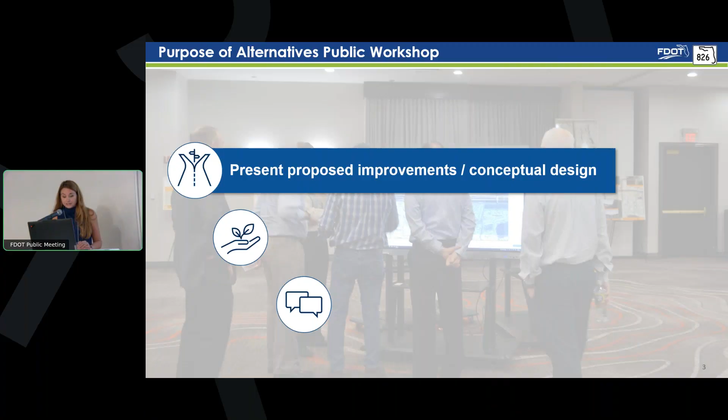The purpose of this workshop is to share information with the general public about the proposed improvements, its conceptual design, and the potential beneficial and adverse social, economic, and environmental effects upon the community. The public workshop also serves as an official forum, providing an opportunity for members of the public to express their opinions regarding the project.

Today's Alternatives Public Workshop has been broken down into 3 sessions. The first session is the formal presentation, which will explain the project purpose and need, study alternatives, and potential impacts, both beneficial and adverse. The second session is the exhibits overview video, which will explain the project exhibits and how to navigate the website. The third session will be the formal comment period, where you will have the opportunity to provide oral statements or in writing.

If you wish to make a comment, you can do so by completing one of the comment forms available at tonight's workshop. You may also provide oral statements by completing a speaker card. Those making oral statements will be called to the microphone in the order speaker cards are received. Please include your full name and address with your comment.

Oral statements will be limited to 3 minutes. You may also email or mail your comment to the project manager. All comments will be added to the meeting record. All forms of comment received will carry equal weight.

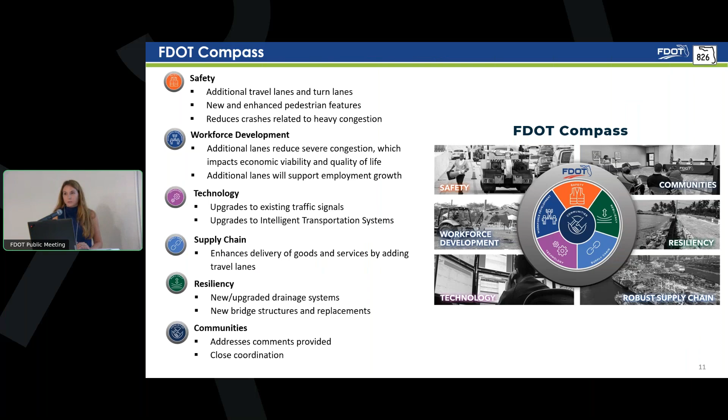Before we begin the formal presentation, we want to showcase the FDOT compass, which highlights key focus areas for the state considered in every project. These focus areas are safety, workforce development, technology, robust supply chain, resiliency, and communities at the center of the compass, as everything we do impacts the communities we serve. This project focuses on all areas of the compass. We are now ready to begin the formal presentation.

The Florida Department of Transportation welcomes you to the Alternatives Public Workshop for the State Road 826 Palmetto Expressway PD&E Study from US 1 to Northwest 25th Street in Miami-Dade County, Florida. This Alternatives Public Workshop is for Financial Project Identification Number 432-639-1-22-02 and Efficient Transportation Decision-Making Number 14308.

The Project Development and Environment Study, or PD&E, is the second step in the project development process that the Florida Department of Transportation follows to ensure consideration of environmental impacts, social impacts, public input, engineering design, and project costs when evaluating a planned transportation improvement project.

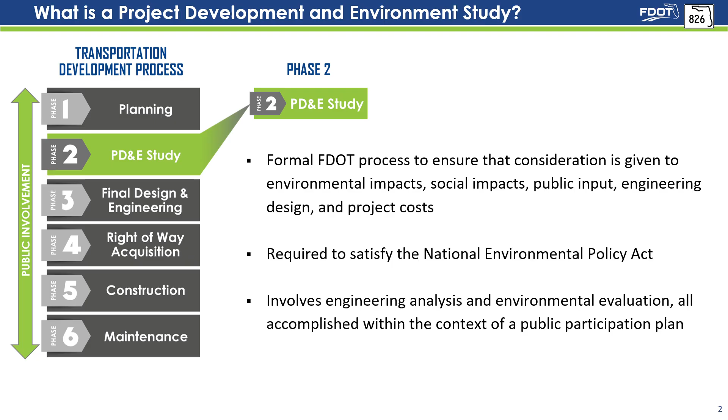The PD&E process was established by the FDOT as the state's procedure for complying with the National Environmental Policy Act, or NEPA, of 1969, and is required to secure federal approval and funding. The PD&E process is an integrated work effort involving engineering analysis and environmental evaluation, all accomplished within the context of a public participation plan.

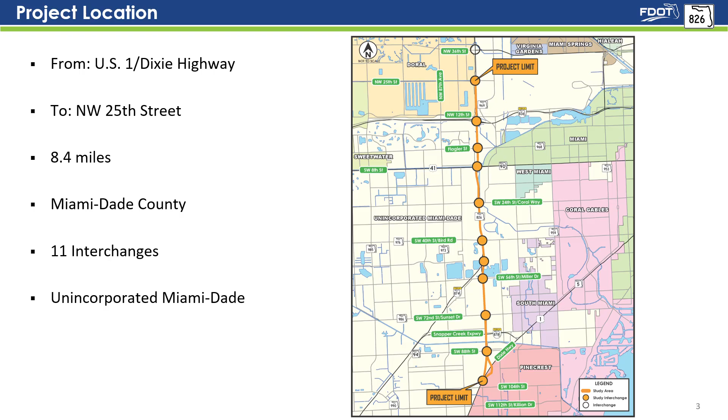The State Road 826 corridor project limits run from US 1 Dixie Highway to Northwest 25th Street, a total length of approximately 8.4 miles in Miami-Dade County, Florida. The study area includes 11 interchanges within unincorporated Miami-Dade.

The purpose and need for a project provide the basis for developing, considering, evaluating, and eliminating project alternatives. The Palmetto Expressway widening project's purpose and need are to accommodate travel demands, enhance safety, improve system linkage and freight, and enhance emergency response and evacuation.

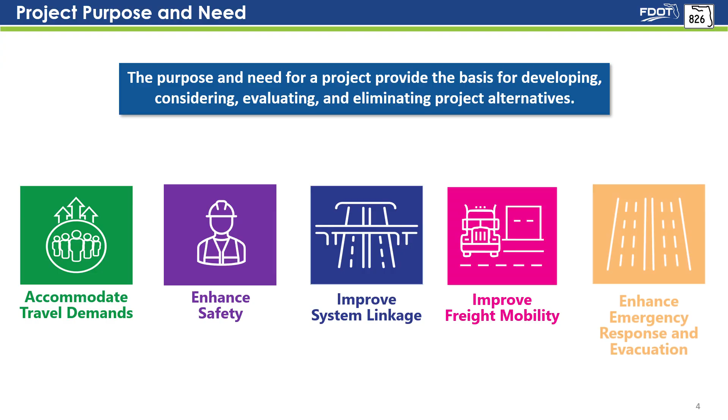In terms of corridor traffic demand, the project traverses 4 major transportation planning areas, with population and employment growth estimated to increase between 12.5 and 64.5%.

Concerning safety, the study area has experienced a greater overall number of crashes, with 4,729 crashes during a 5-year period. 56% of these crashes have been rear-end crashes.

This segment of State Road 826 is the missing link that will provide continuous improvements along the corridor and enable better connectivity with other roadways between US 1 and I-95.

The State Road 826 corridor carries over 10,000 freight trucks daily. Enhancing traffic conditions along this corridor will facilitate the movement and delivery of freight.

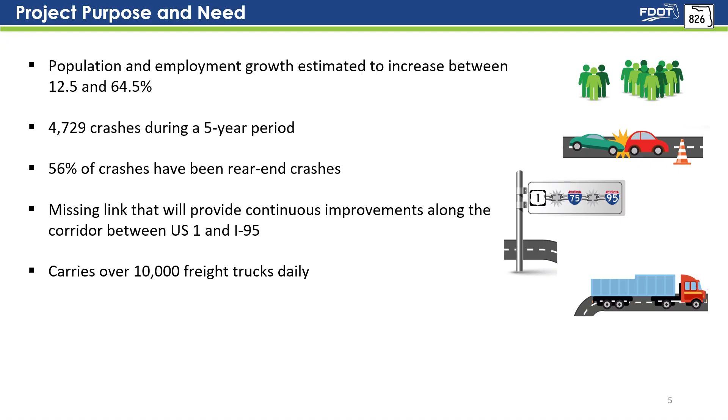State Road 826 serves as part of the Emergency Evacuation Route Network. State Road 826 is crucial in facilitating traffic movement during emergency evacuation periods as it connects to other major arterials and highways within the state's evacuation route network.

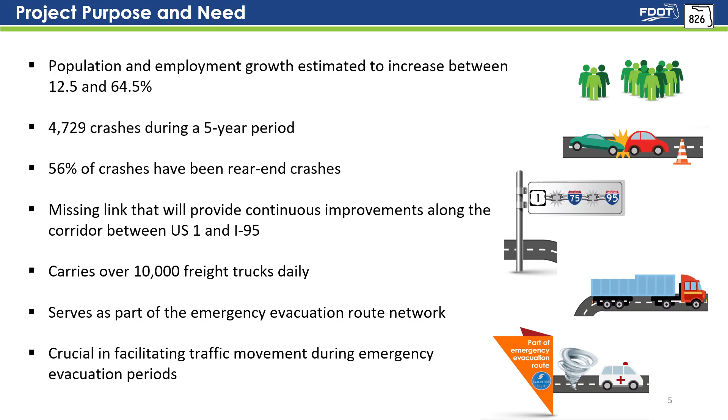State Road 826 between US 1 and State Road 874 consists of 5 to 6 travel lanes, 3 lanes in the northbound direction and 2 to 3 lanes in the southbound direction, with auxiliary lanes at select locations. Between State Road 874 and State Road 836, the corridor consists primarily of 12 travel lanes, 6 lanes in each direction.

The State Road 826 corridor is designated as a strategic intermodal system facility, is part of the Emergency Evacuation Route Network, and the National Highway System.

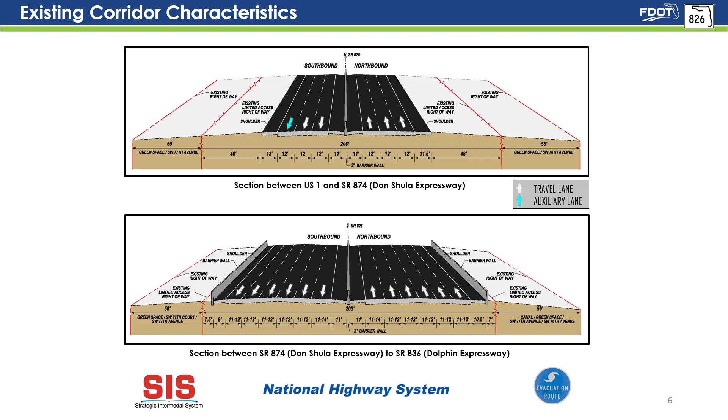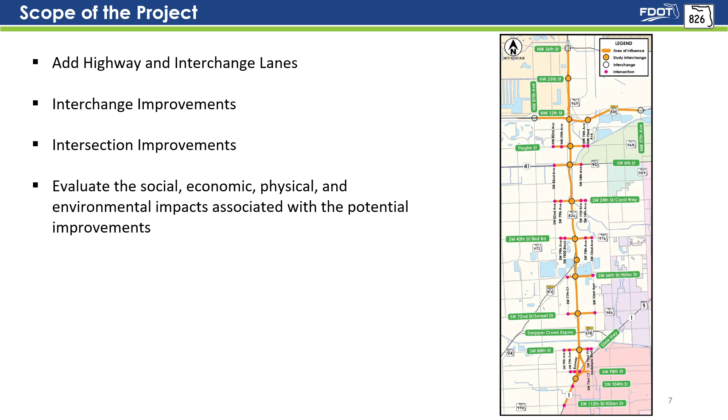The scope of this PD&E study is to evaluate corridor improvements that will add highway and interchange lanes, modify interchange ramps, and enhance intersection improvements to improve the corridor's operations. The study is also evaluating the social, economic, physical, and environmental impacts associated with the potential improvements, all with the goal of identifying a preferred alternative.

The PD&E study evaluated traffic operations with future projections for 2035 and 2055.

Public meetings are to be held to involve the public, local officials, and interested agencies in the project development process. These public meetings provide updates on the project's status and solicit input from the public. 4 public meetings have been held for this PD&E study. Today, we are holding the 3rd Alternatives Public Workshop.

Small group meetings and one-on-one stakeholder meetings have been held with public officials and other stakeholders throughout the study. The intent of these meetings is to present the latest project information and to provide opportunities to discuss specific issues and/or concerns. Project newsletters and fact sheets have been prepared for the study and distributed at all the public meetings. A project website was developed for the project and includes all pertinent information about the PD&E study. The project website is another method used to allow the public to communicate with the project team and provide comments.

The objective of this PD&E study is to evaluate alternatives that will address existing and projected operating deficiencies along this section of State Road 826. To keep up with the growing traffic demand within the study area, multiple alternatives have been considered, including a no-build alternative that maintains the existing roadway configuration and any other planned improvements along the corridor.

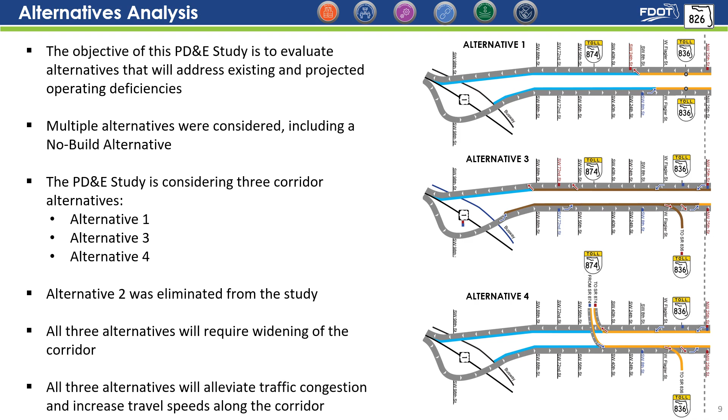The PD&E study is considering 3 corridor alternatives: alternatives 1, 3, and 4. Alternative 2 was eliminated from the study. All 3 alternatives will require widening of the corridor, and all 3 will alleviate traffic congestion and increase travel speeds along the corridor.

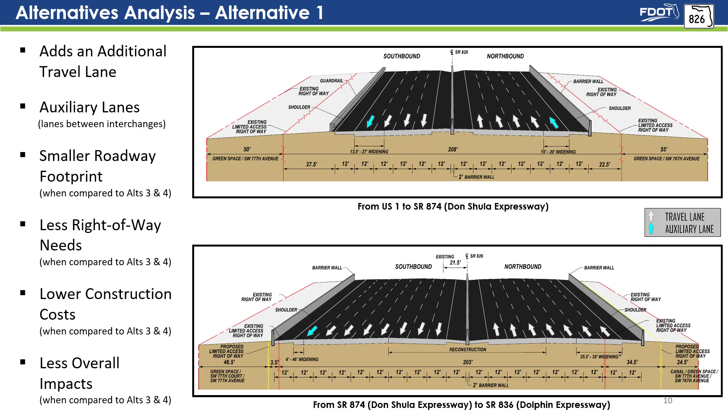Alternative 1 proposes adding an additional travel lane in each direction between US 1 and State Road 836, with auxiliary lanes at select locations. Alternative 1 requires a smaller roadway footprint when compared to alternatives 3 and 4. Therefore, Alternative 1 has less right-of-way needs, lower construction costs, and less overall impacts when compared to Alternatives 3 and 4.

Alternative 3 proposes adding an untolled managed lane in each direction between US 1 and State Road 836, with auxiliary lanes at select locations. The managed lane is separated by a buffer with tubular markers, with restricted access points for entry and exit.

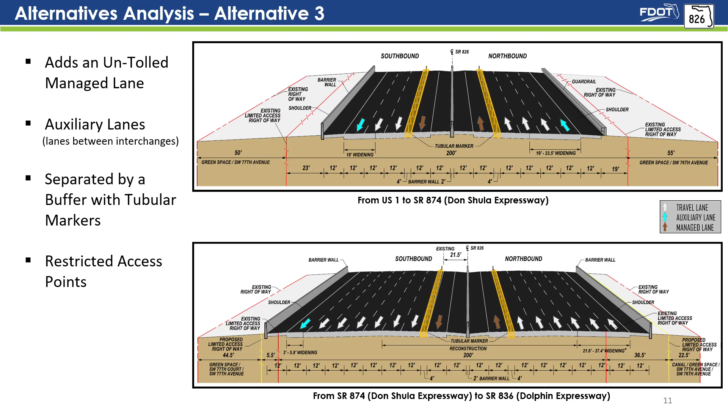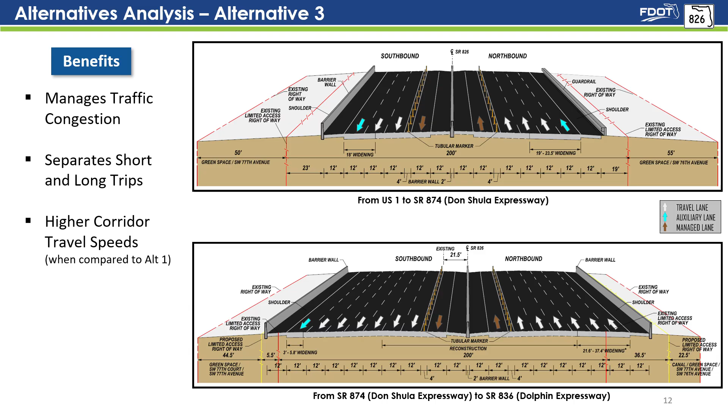Managed lanes are an innovative solution for managing traffic congestion, placing strategic access points to separate short trips from long trips. Other benefits of Alternative 3 include higher corridor travel speeds and the ability to move more traffic when compared to Alternative 1.

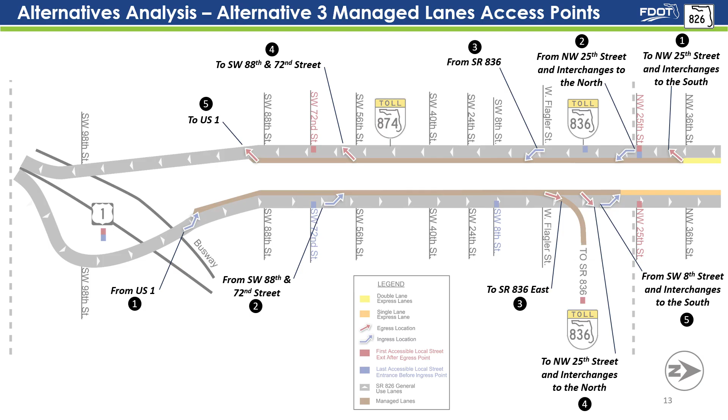This schematic line diagram illustrates the Alternative 3 potential access points for entering and exiting the managed lanes. North is to the right. Alternative 3 includes 5 potential access points in each direction along the State Road 826 corridor: 5 northbound and 5 southbound, allowing for entry and exit into the managed lanes system.

Alternative 4: Between US 1 and State Road 874, Alternative 4 proposes adding an additional travel lane in each direction with auxiliary lanes at select locations. Between State Road 836 and State Road 874, Alternative 4 proposes extending the existing State Road 826 express lanes to the south, terminating at State Road 874, with access points and tolls to manage traffic congestion.

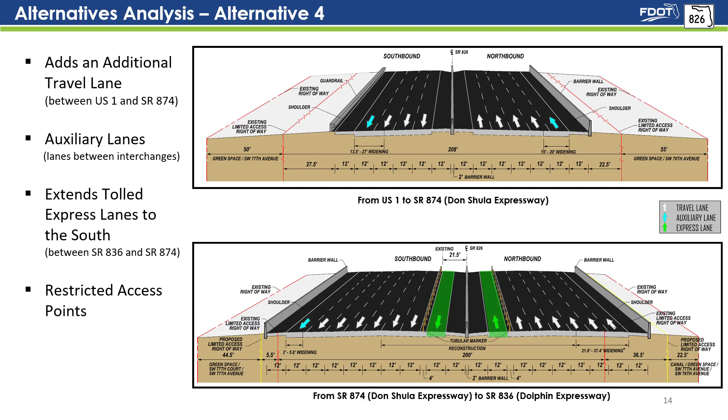The express lane is separated by a buffer with tubular markers. Express lanes also manage traffic congestion by placing strategic access points and a toll to separate short trips from long trips, offering travelers choices for traveling through the corridor.

Key benefits for Alternative 4 are the reliability of the express lanes to operate at 55 miles per hour during peak hour periods. Alternative 4, when compared to Alternatives 1 and 3, offers higher corridor travel speeds, improved overall traffic conditions, and the ability to move more traffic, providing the best driver experience for both the express lane and non-tolled travel lanes.

Alleviating congestion, combined with separating long and short trips, reduces the number of crashes along the corridor, which significantly lowers the number of lane closures during an accident.

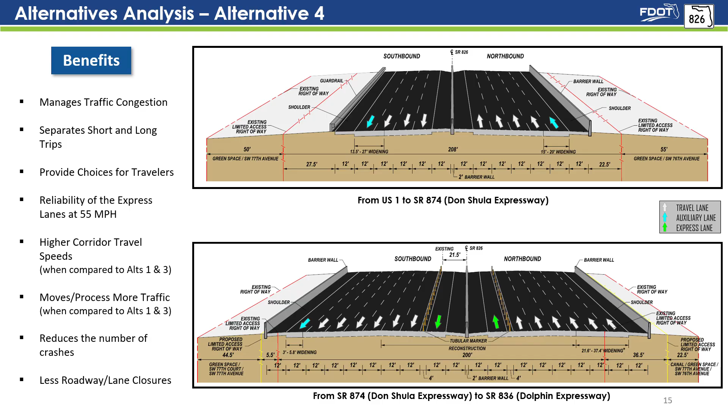Alternative 4 includes 4 potential access points in each direction, 4 northbound and 4 southbound, allowing for entry and exit into the express lane system between State Road 874 and State Road 836.

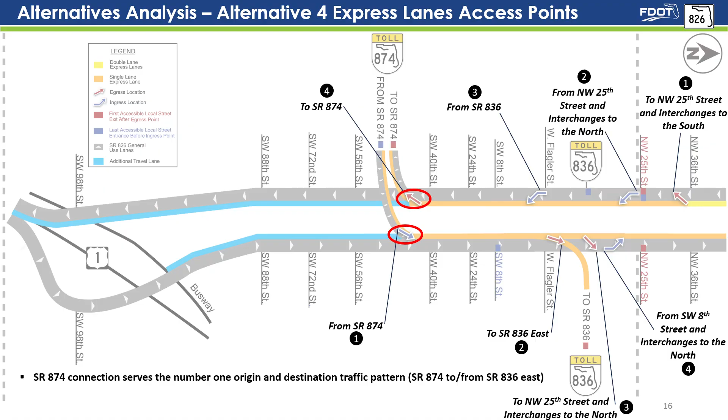One unique feature of Alternative 4 is that it proposes an express lane connection to State Road 874 to and from the north. This connection will serve the number one origin and destination traffic pattern along State Road 826, traveling between State Road 874 and State Road 836 east.

This connection moves approximately 1,650 vehicles out of the non-tolled travel lanes into the express lanes. This traffic shift reduces the volume of weaving and lane-changing traffic, providing congestion relief and safer operating conditions along the corridor.

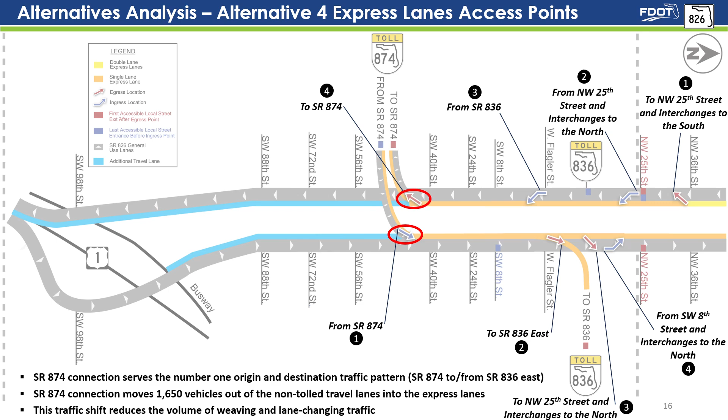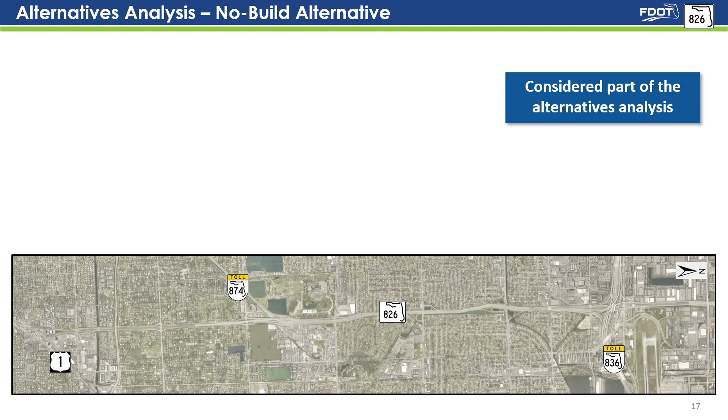In every PD&E study, the no-build or no-action alternative is considered part of the alternatives analysis. The no-build alternative proposes to keep the existing study area without corridor improvements into the future. The advantages of this alternative are no impacts to the social, cultural, physical, or natural environment, no right-of-way needs, and no associated construction costs.

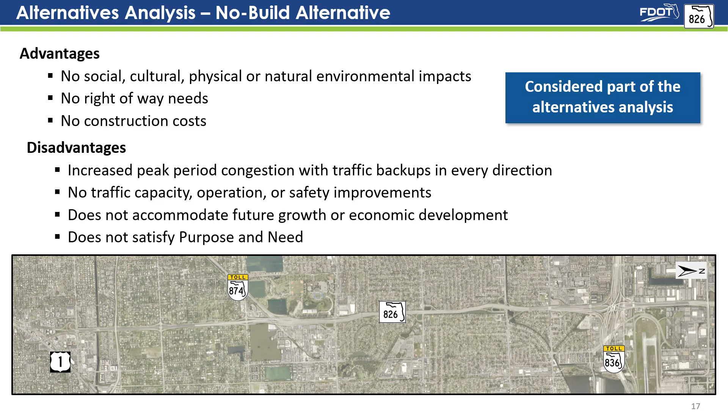The disadvantages of this alternative are the effects associated with the acceptance of increased peak period congestion with traffic backups in every direction, safety issues, and slower emergency response times. No traffic capacity, operation, or safety improvements would be implemented throughout the corridor. Future growth of the study area will not be accommodated. Therefore, the needs of the area will not be satisfied, and congested traffic conditions will continue.

All build alternatives propose interchange and intersection improvements for 10 out of the 11 interchanges. The interchange improvements will vary from minor to major capacity enhancements.

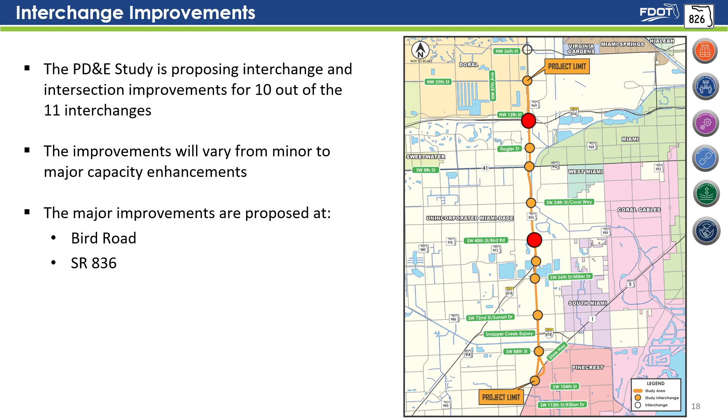The major interchange improvements are proposed at Bird Road and State Road 836. The PD&E study proposes reconfiguring the State Road 826 and Bird Road interchange to a U-turn elevated interchange concept.

The U-turn concept is an innovative design that eliminates left turn movements at the ramp terminals and replaces them with right turn movements. If you are traveling northbound on State Road 826, you will exit at Bird Road the same way you do today.

You will continue to the right if your destination is Bird Road East. If your destination is Bird Road West, you will continue traveling north over Bird Road and follow the elevated U-turn ramp, which will take you to the west side of the interchange, where you will be turning right at the ramp terminal to continue west on Bird Road.

If you are traveling southbound on State Road 826, you will exit at Bird Road the same way you do today. You will continue to the right if your destination is Bird Road West.

If your destination is Bird Road East, you will continue traveling south over Bird Road and follow the elevated U-turn ramp, which will take you to the east side of the interchange, where you will be turning right at the ramp terminal to continue east on Bird Road.

This interchange design eliminates a traffic phase from the ramp terminal intersections, allowing more green time to share with other movements. This interchange configuration improves the operations of both State Road 826 and Bird Road, achieving an acceptable level of service and processing more vehicles through the intersections.

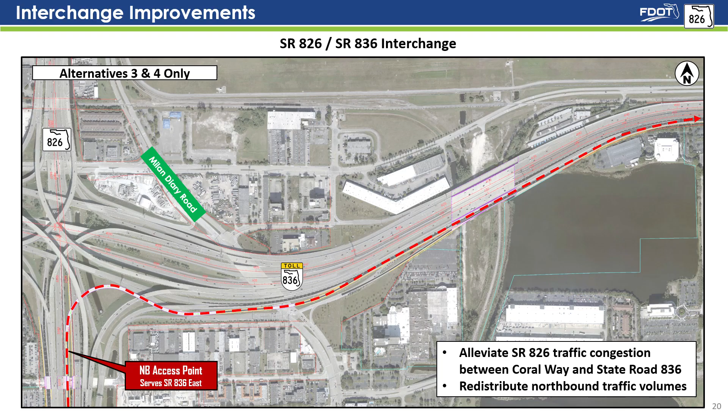The traffic volume between State Road 826 northbound and State Road 836 eastbound is very high. This new ramp will help redistribute the volume in conjunction with the existing ramp, improving the operations of the State Road 826 northbound lanes approaching State Road 836.

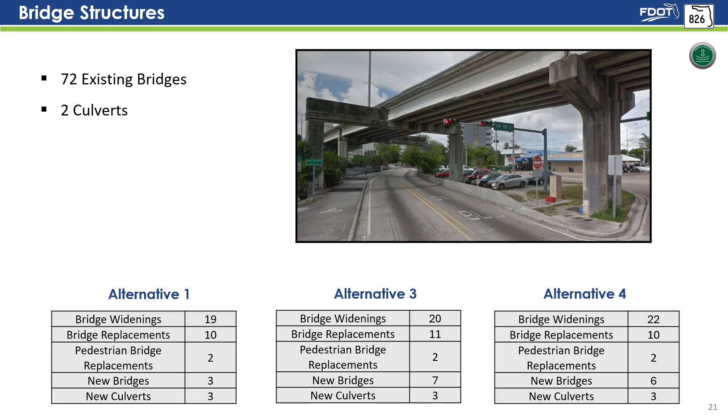There are 72 existing bridges and 2 culverts within the study limits. Under each alternative, bridges are being evaluated to identify how many can be widened, how many need to be demolished and replaced, and how many new bridges are required to accommodate the future improvements.

The corridor has 22 drainage systems. All systems will be enhanced to accommodate the storm water runoff from the roadway improvements.

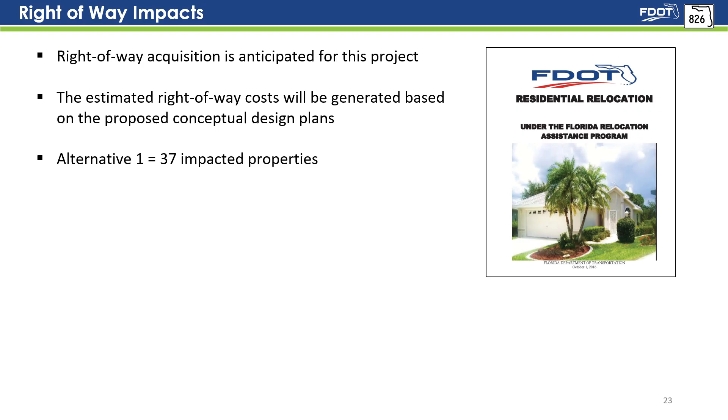Right-of-way acquisition is anticipated for this project. The estimated right-of-way cost will be generated based on the proposed conceptual design plans, which will be completed in the next few months. 37 properties are anticipated to be impacted by Alternative 1, 52 properties by Alternative 3, and 45 properties by Alternative 4. The level of impacts will be identified later in the study.

All right-of-way acquisition will be conducted in accordance with Florida Statutes 339.09 and 421.55, as well as the Federal Uniform Relocation Assistance and Real Property Acquisition Policies Act of 1970, commonly known as the Uniform Act. Right-of-way specialists supervising this program are here tonight and will be happy to answer your questions.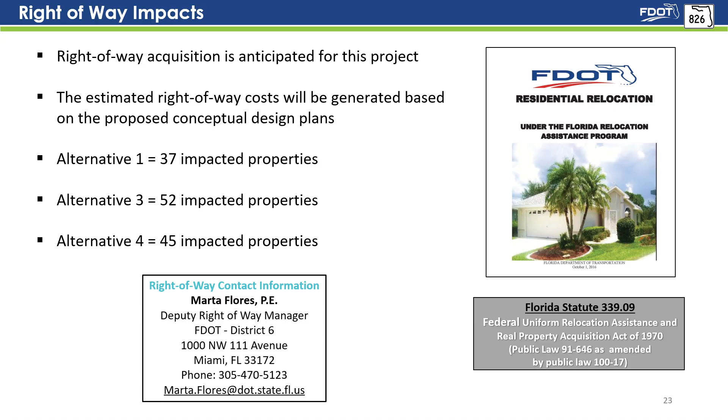The social and economic evaluations determined that relocation impacts will occur with residential and commercial properties. The proposed project will enhance safety, emergency evacuation, and mobility. There will be a limited reduction in taxable land due to the relocations.

The additional lanes will improve and support freight movement through the project area. The proposed improvements will enhance multimodal access and regional network connectivity. There will be a potential for increased visual awareness of the roadway corridor with the addition of elevated ramps, lanes, and noise walls.

No adverse impacts to historic or archaeological resources are anticipated as a result of the project. The project has no Section 4(f) involvement for recreational resources, as the build alternatives avoided impacts to all parks.

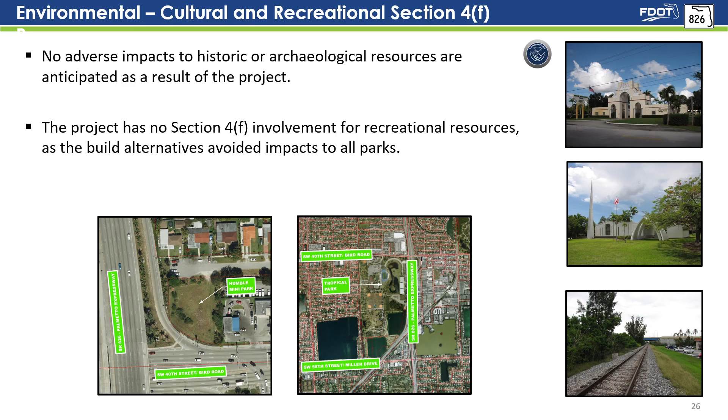A state historic highway was identified within the study limits: Sunset Drive between Southwest 69th Avenue and Southwest 87th Avenue. The designated segment will be impacted by the need to enhance traffic safety due to high crash rates.

The proposed improvements are being coordinated through the State Historic Preservation Officer to ensure compliance with state law. A community engagement meeting was held in October 2024 regarding the proposed improvements along Sunset Drive to receive feedback from the local residents and users of the corridor.

10 federally listed animal species and 3 federally listed plant species were identified to occur within the project limits. The project will not adversely affect federally designated critical habitats.

No adverse effects are anticipated on any state-listed animal and plant species identified within the project limits.

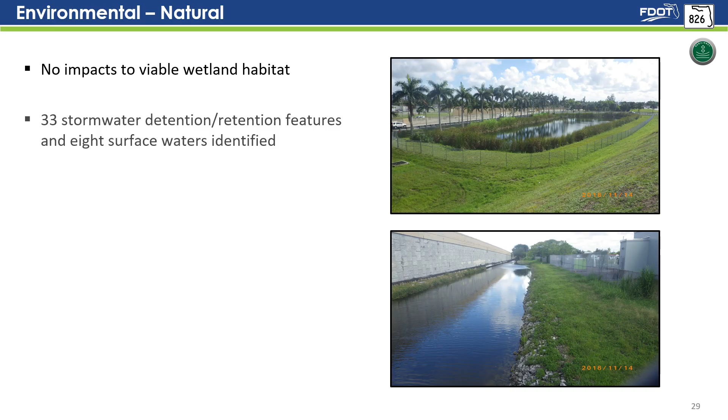Viable vegetated wetland habitat does not exist within the project limits. However, 33 stormwater detention/retention features and 8 surface waters were identified. The impacts to these surface water features are anticipated to be compensated by constructing a new stormwater management system for the project. No adverse impacts to water quality downstream of the construction area are anticipated.

A traffic noise study is being performed to assess the potential traffic noise impacts associated with the project and to evaluate the feasibility and reasonableness of noise barriers as an abatement measure at the impacted sites. The noise study will be performed in accordance with state and federal regulations and guidelines.

The traffic noise study process includes several steps. One of the initial steps is to identify the location of noise-sensitive sites along the project corridor, including residential units, schools, parks, places of worship, cemeteries, hotel pools, restaurants, and medical facilities.

The next steps include predicting traffic noise levels for the existing conditions and the future no-build and build alternatives using the Federal Highway traffic noise model, and the determination of traffic noise impacts.

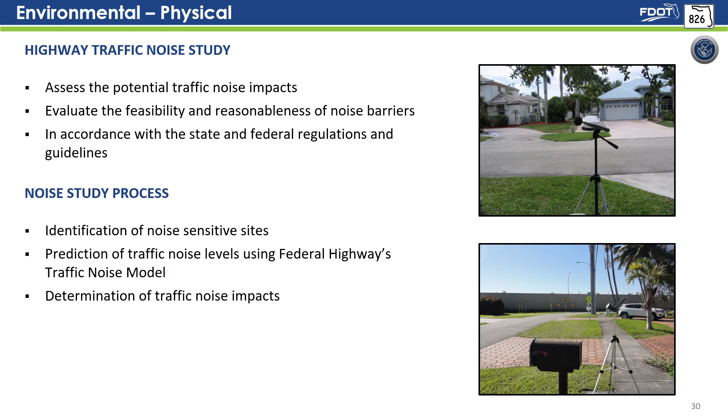For all impacted sites, noise barriers will be evaluated as an abatement measure. Any modifications to or the replacement of any existing noise barriers physically impacted by the project will also be evaluated.

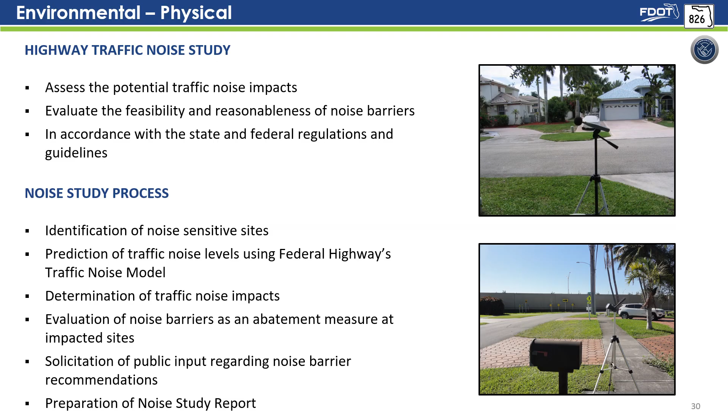Input from the public on the noise barrier recommendations will be solicited during this and future project phases. The methodology and results of the study, including the noise barrier recommendations, will be summarized in a noise study report that will be made available for the public's review prior to the public hearing.

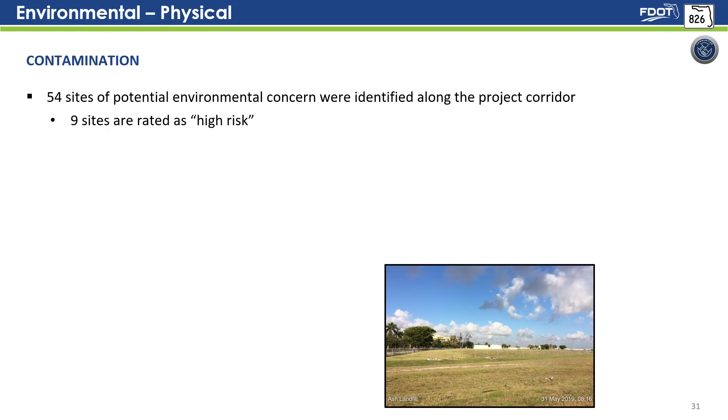54 sites of potential environmental concern were identified along the project corridor. 9 sites are rated as high risk, 14 sites are rated as medium risk, and 31 sites are rated as low risk. The contaminants of concern for the high risk and medium risk sites include dry cleaning solvents and petroleum.

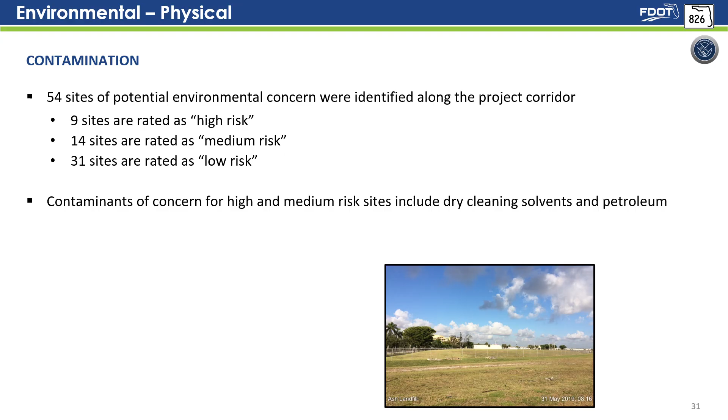A Level 2 contamination assessment is recommended during the project design phase for the high and medium risk sites prior to the right-of-way acquisition.

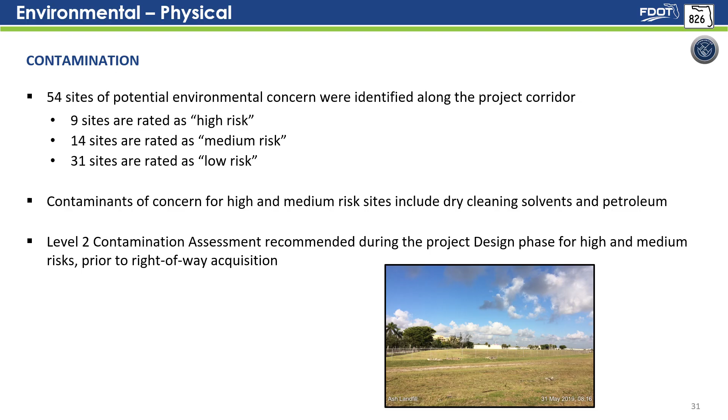The PD&E study developed a preliminary construction cost estimate for the 3 alternatives using the FDOT Long Range Estimate Cost Estimating System.

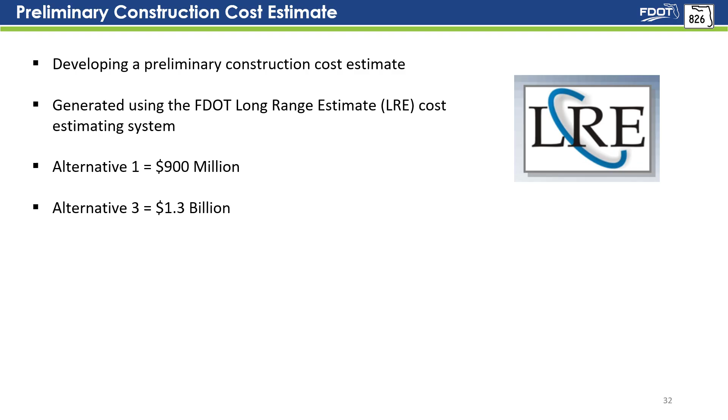The preliminary construction cost estimate for Alternative 1 is approximately $900 million. For Alternative 3 it is $1.3 billion, and for Alternative 4 it is $1 billion. Alternatives 1 and 4 are lower than Alternative 3. These estimates do not include utilities, environmental, or right-of-way costs.

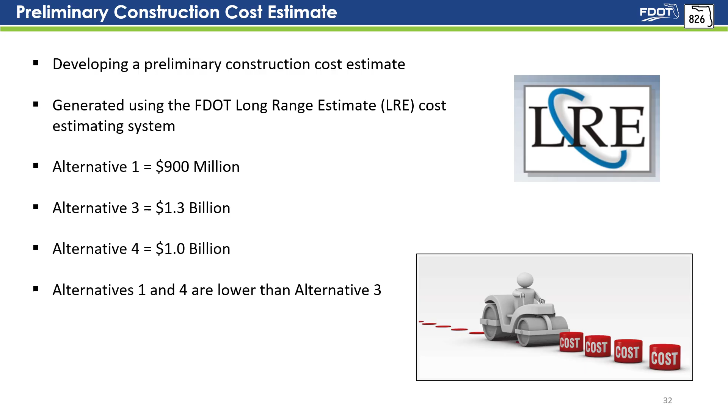Today, you are attending the Alternatives Public Workshop. The public hearing, where FDOT will be presenting the preferred alternative, is expected to be held by May 2026. The PD&E study is anticipated to be completed by November 2026.

Over the next several months, FDOT will continue to finalize the analysis and seek approval after the public hearing. Following approval, FDOT will continue with the design phase in fiscal year 2027. As of today, right-of-way is partially funded and construction is unfunded.

Your input is essential to the PD&E study process. We continue to encourage public input to help us make this important decision.

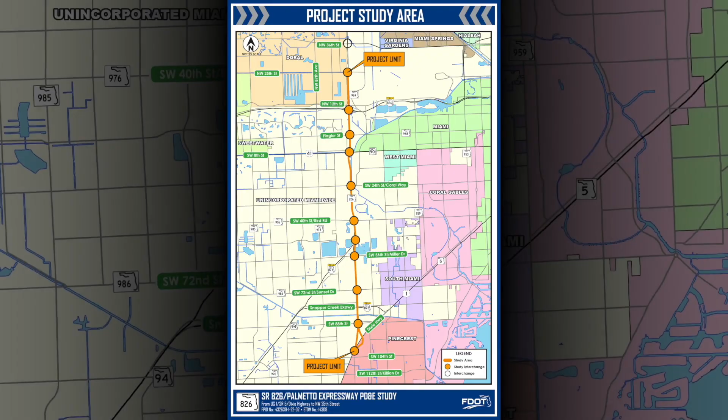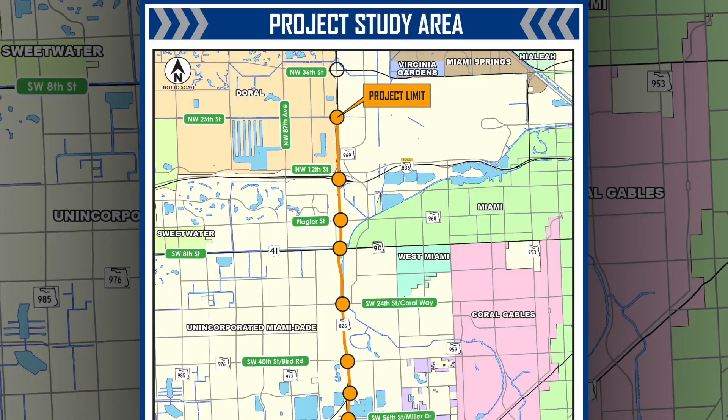The first exhibit is the Project Study Area. This exhibit depicts the project study area extending from US 1 Dixie Highway to Northwest 25th Street, including the corridor interchanges and the surrounding municipalities. The project total length is approximately 8.4 miles in Miami-Dade County.

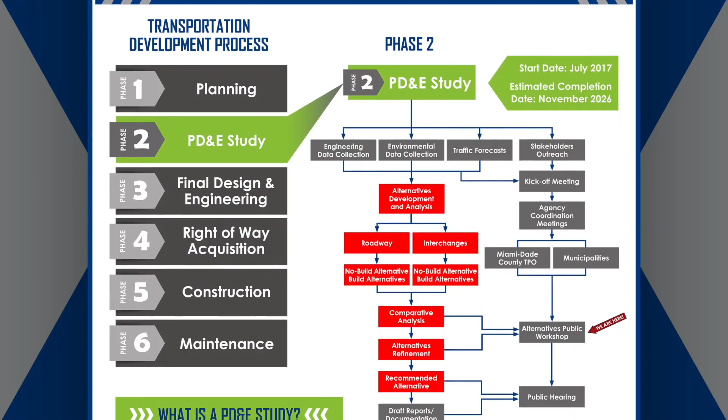The next exhibit is the PD&E study process, which outlines the process itself. The basic steps of a PD&E study include data collection, development and analysis of alternatives, development of project documents, and final approval.

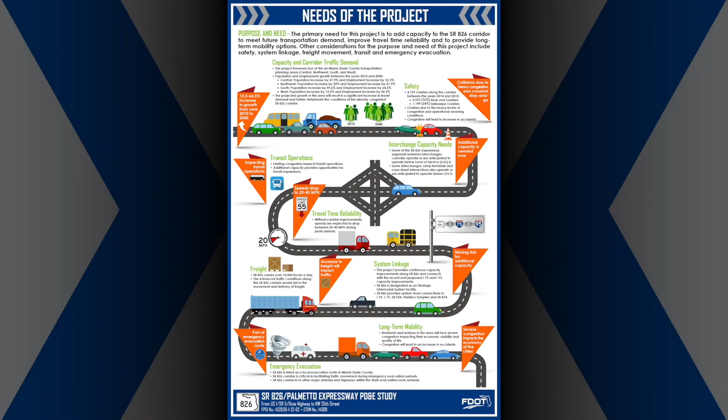Needs of the project. This exhibit summarizes the project's purpose and needs, as well as the 9 areas of the corridor that currently do not meet the necessary conditions for optimal operation.

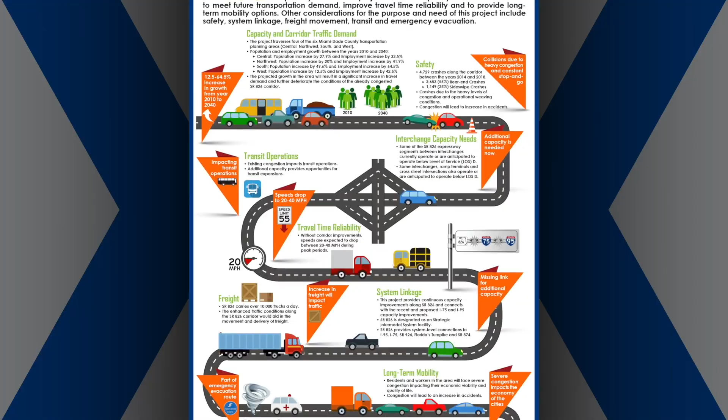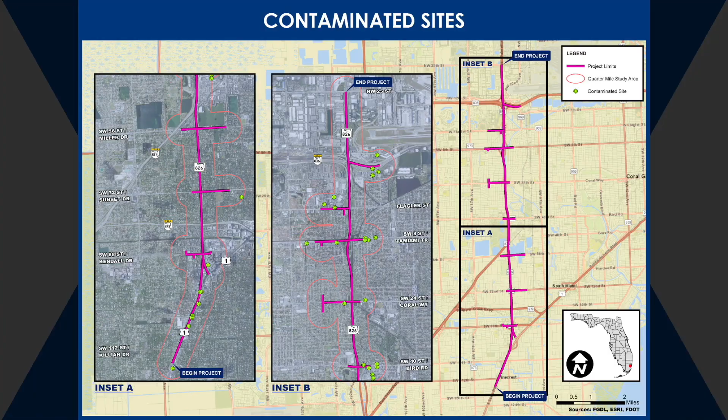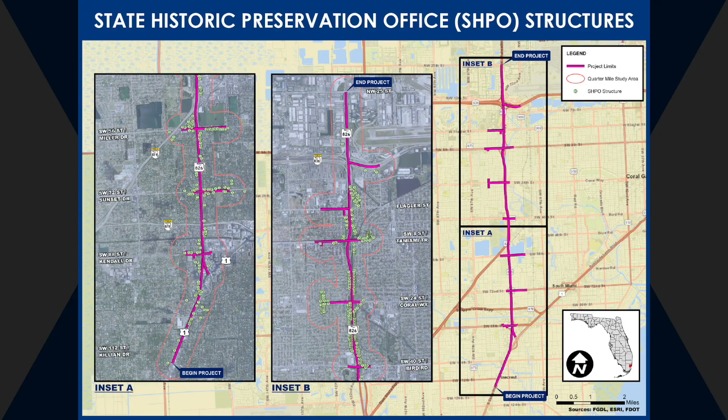Existing environmental features. This figure delineates and locates all the known environmental features within the study area. This figure covers 10 areas: canals crossing the corridor, known contaminated sites near the project corridor, brownfields within a quarter mile of the study area, Miami-Dade County parks next to the study limits, critical habitat of selective species, cultural centers within a quarter mile of the study area, environmentally endangered lands, existing noise barriers, state historic structures immediately adjacent to the project limits, and natural resources, including wetlands, surface waters, and stormwater drainage features.

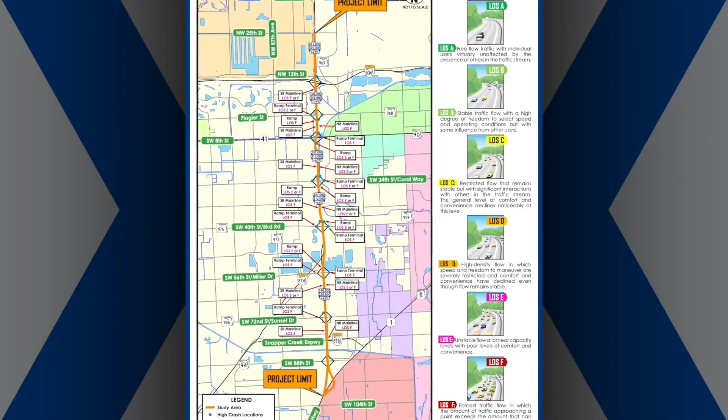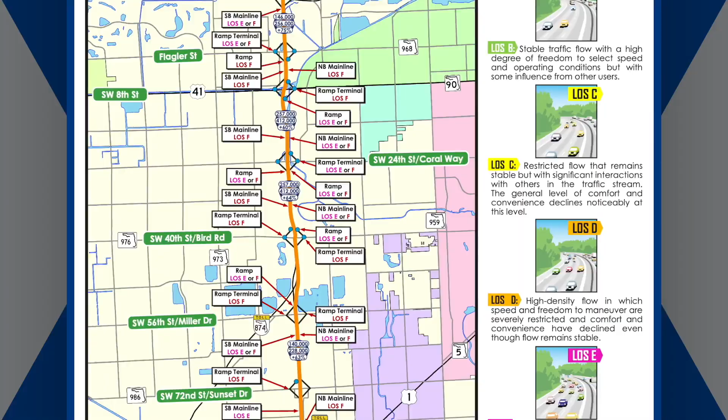No-build alternative conditions. This exhibit shows how the corridor will operate in the future if no improvements are made within the study area. Without improvements, the project corridor will continue to experience high traffic delays and will continue to operate at a level of service F by the design year 2055.

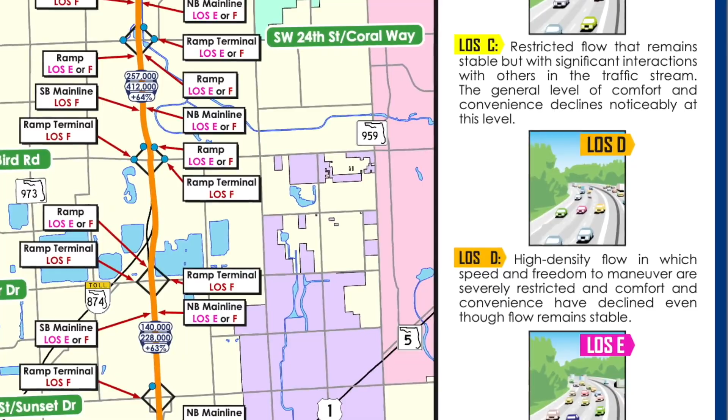FDOT recommends a target level of service D for roadways in urban areas. Therefore, a level of service D or better is considered an acceptable level of service. The description of the different levels of service can be found on the right-hand side of this exhibit.

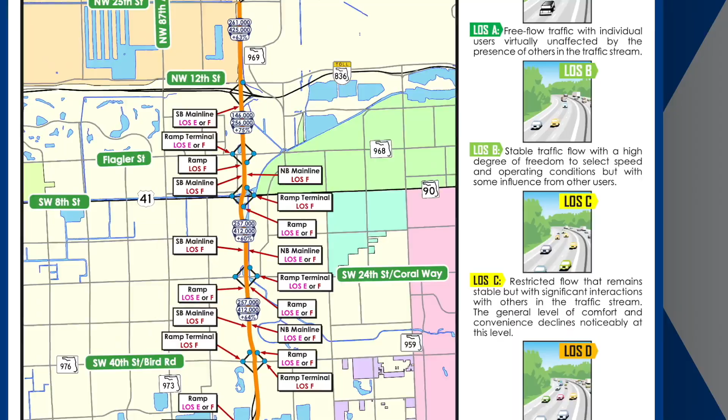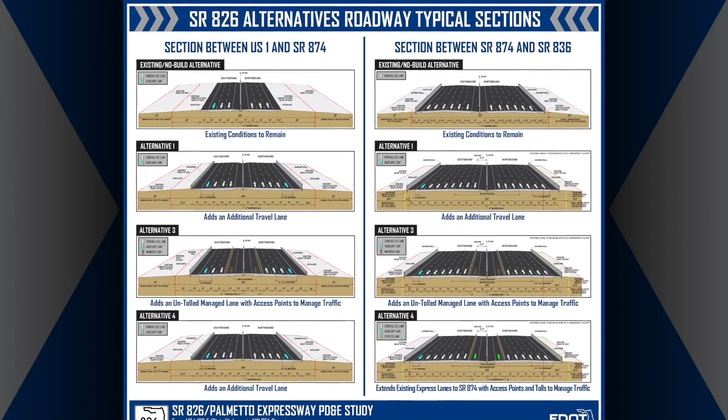State Road 826 Roadway Typical Sections. This exhibit illustrates the number of lanes, dimensions of all roadway elements, and striping of each alternative, including existing conditions. The project limits were divided into two sections: between US 1 and State Road 874, and between State Road 874 and State Road 836.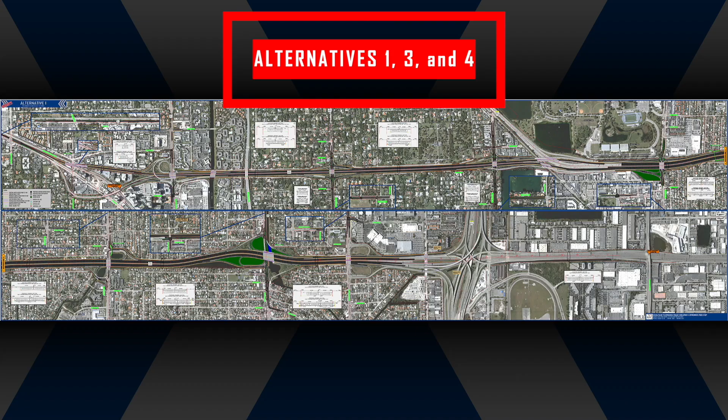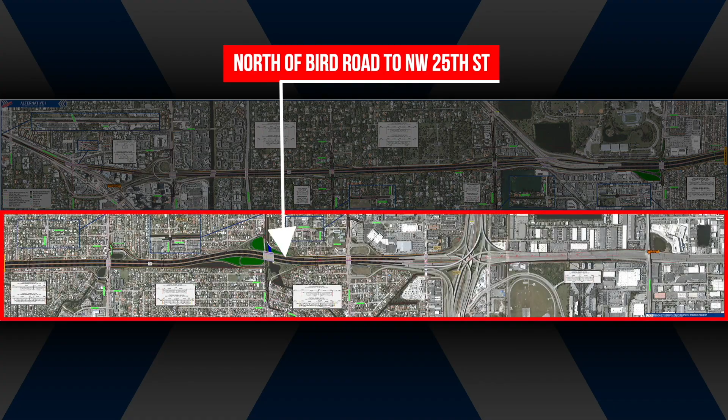Alternatives 1, 3, and 4 Conceptual Designs. These exhibits are roll plots of the alternative designs. The roll plots divide the project limits into two segments. The top segment is from US 1 to north of Bird Road, and the bottom segment is from north of Bird Road to north of Northwest 25th Street.

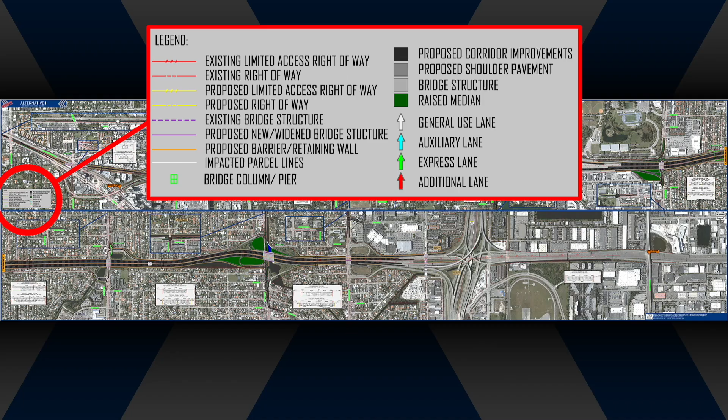In these roll plots, north is to the right. On the left-hand side of the exhibits, you will find a legend defining each color and line shown on the roll plot. In these exhibits, you can see the black shape depicting the footprint of each alternative. The gray shapes are bridges along the corridor.

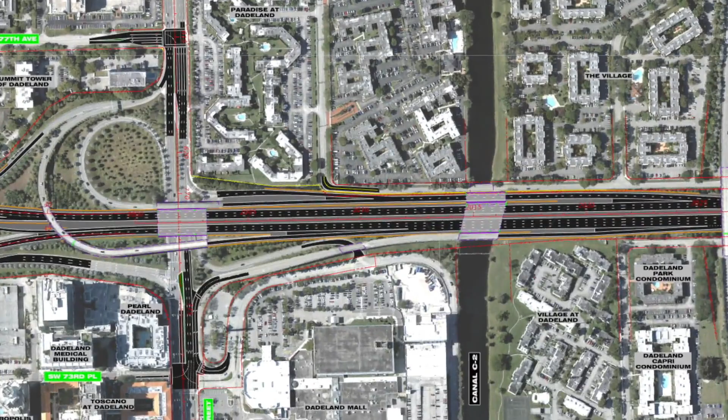On these roll plots, you will also see a roadway cross-section between interchanges depicting the number of lanes, dimensions of all the roadway elements, and the amount of widening necessary to accommodate the additional lanes. The top section is the existing roadway condition, and the bottom section is the proposed roadway condition.

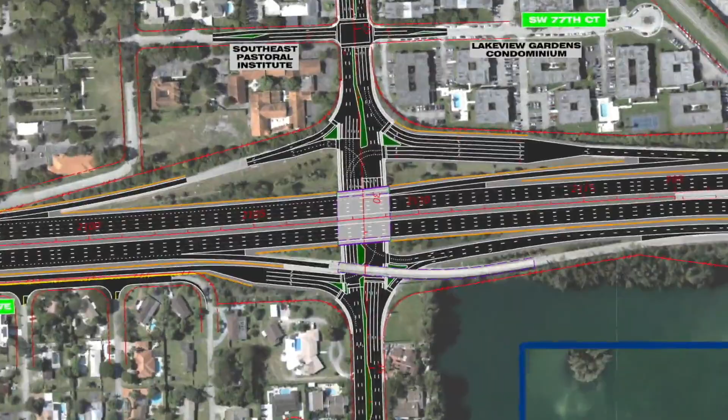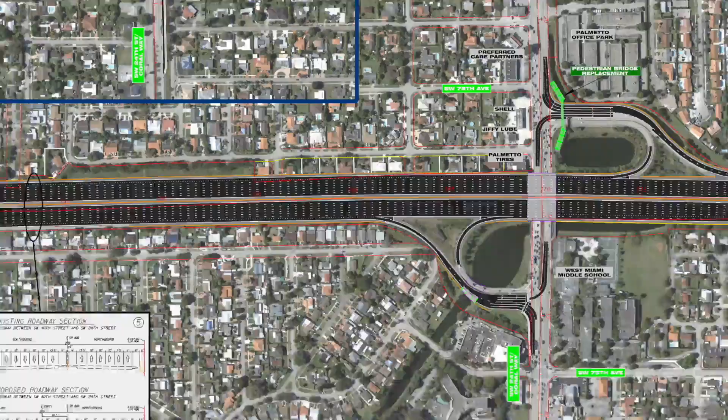If you zoom in on the interchanges, you will see the proposed improvements at each interchange as well as intersection improvements 1 or 2 intersections downstream from the ramp terminals. Right-of-way impacts are necessary at select locations along the corridor. Areas with yellow lines indicate the right-of-way needs for each alternative.

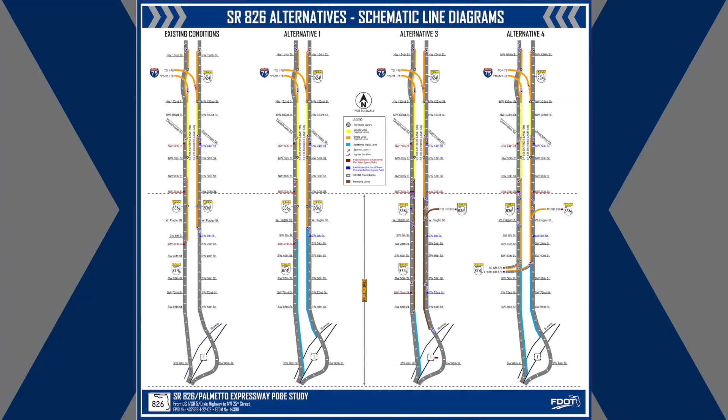Alternatives access points. These schematic line diagrams illustrate the existing and/or potential new access points for entering and exiting the managed lanes and express lanes. North is up. This exhibit includes 4 figures.

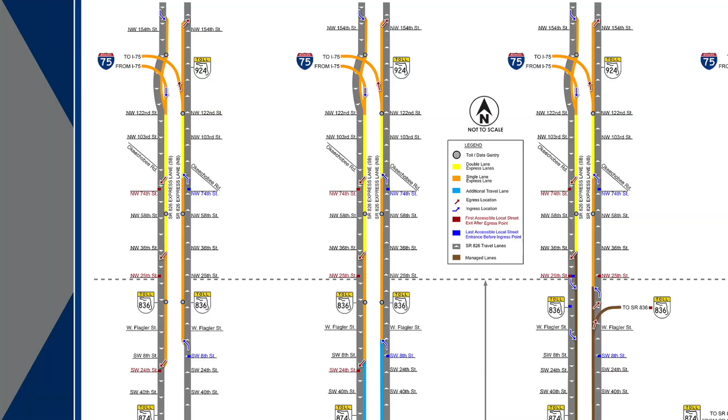On the left is a schematic line diagram illustrating today's express lanes access points along State Road 826 between US 1 and Interstate 75. FDOT recently opened express lanes along State Road 826 between State Road 836 and I-75, shown in orange and yellow. In this figure, you will see the express lane access points serving this section of State Road 826: 4 access points northbound and 5 access points southbound.

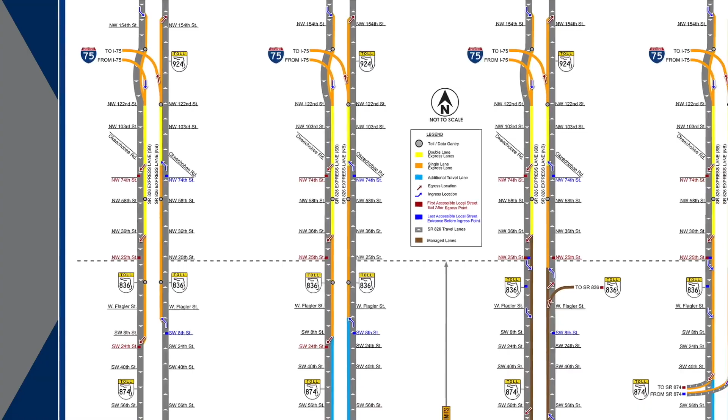On the right are the schematic line diagrams for alternatives 1, 3, and 4 depicting access points, managed lane system in brown, and new non-tolled lanes in blue.

Project schedule. This exhibit lists the next milestones of the PD&E study, the beginning of the design phase, and the funding information to date.

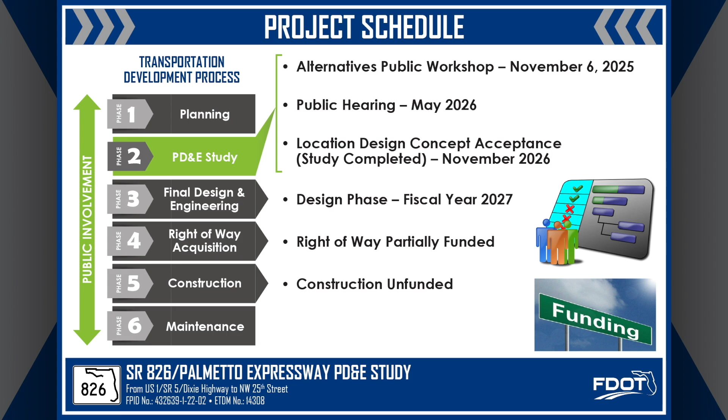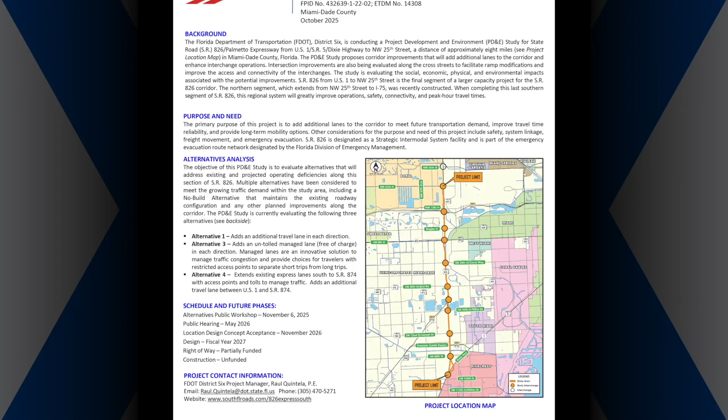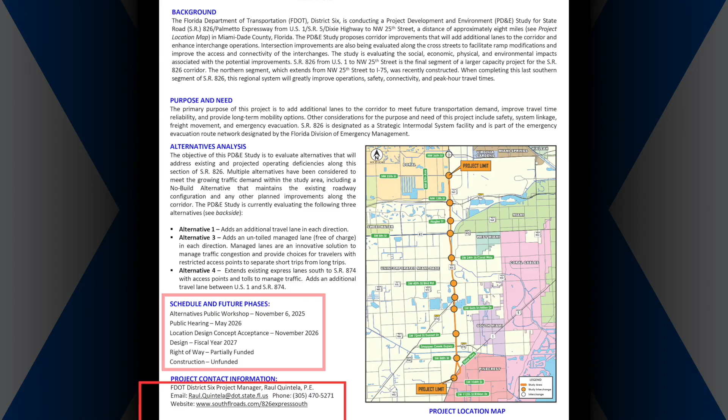An alternative public workshop fact sheet is also available for download on the project website. The fact sheet summarizes the highlights of the study to date. Page 1 includes a summary of the project background, purpose and need, alternatives analysis, schedule, and contact information. Page 2 illustrates the alternatives roadway cross sections.

Thank you for watching the exhibits overview video session. Any questions not answered by the exhibits will be answered during the comment period session.